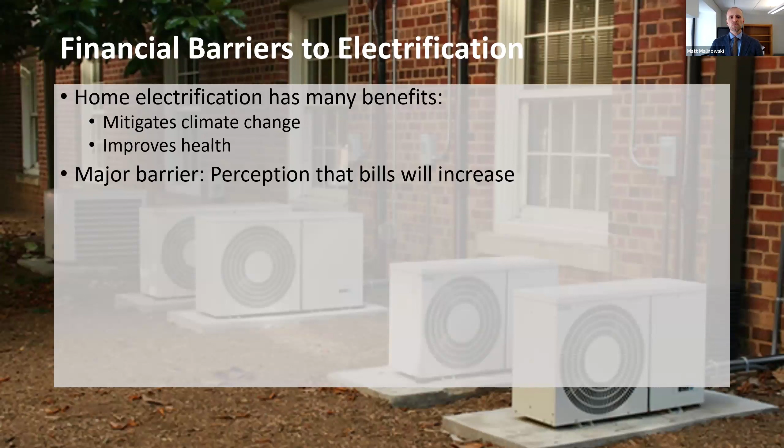Just a brief summary of our methodology: we simulated energy bills in 4 cold states - Maine, Minnesota, Colorado, and Connecticut - using ResStock modeling. These are hourly models of archetypal homes in each state that give you electric and gas loads, and also the results of upgrading those homes with heat pumps and energy efficiency. We took those model outputs and applied realistic rate structures based on those offered by the largest utilities in each state. That's the novelty of this approach - we didn't look at average rates or average heat pump efficiencies, but really looked at performance in each hour of the day and year and the corresponding utility rates to see what would really make a difference.

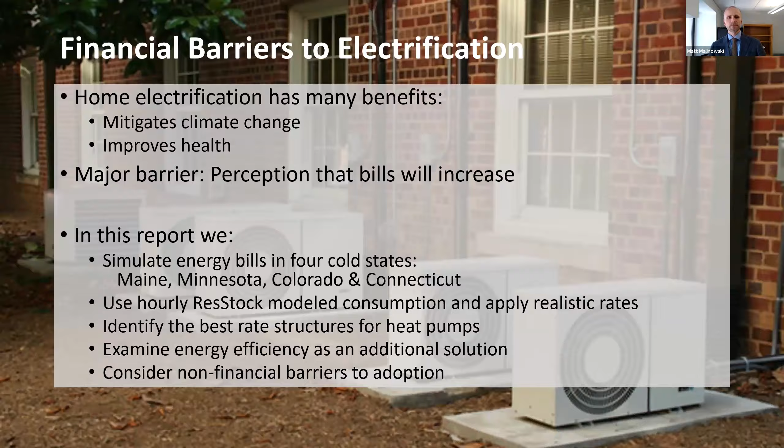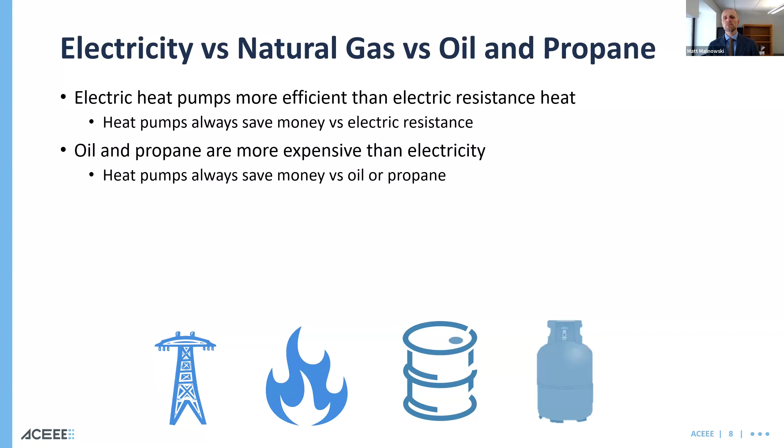Just a brief overview of what we can say with some confidence: heat pumps are more efficient than electric resistance heat. They are more efficient and more cost effective than oil and propane in terms of bills, and will reduce your bills. But the challenge is with natural gas, which is less expensive, much less expensive in some cases than electricity, and heat pumps sometimes can't make up that difference. They often save money versus natural gas, but not always, as we'll see in the subsequent slides.

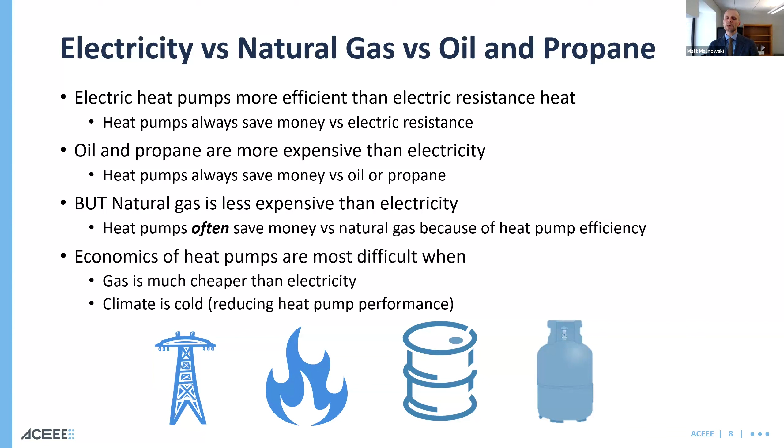This is exacerbated by the fact that in some states, gas is much cheaper than electricity, as well as the colder it gets, the bigger a hit the heat pump takes to performance. So again, it can't make up that cost difference in some cases.

But rates can go a long way to fixing this. If you imagine just a basic flat rate that doesn't change with time or season, the thing to understand is that the wholesale price of electricity to distribute and generate it changes throughout the day and throughout the season. So if you have a flat rate, customers using electricity during peak periods are underpaying for that electricity, while those using a lot of electricity during off-peak periods are overpaying, because the electricity should be cheaper then.

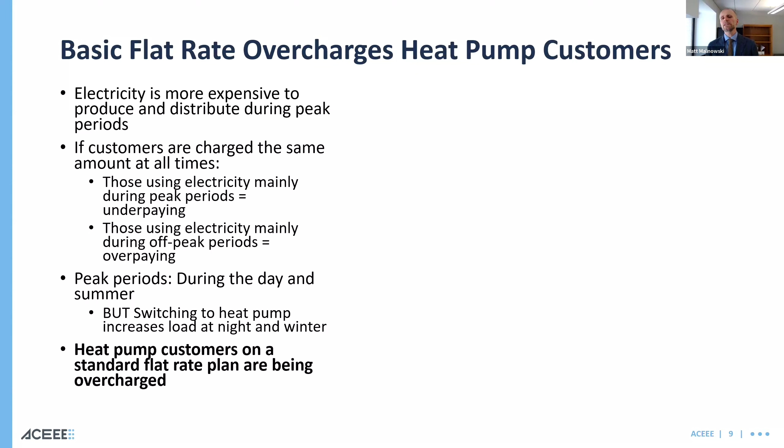And those peak periods in the northern states we're looking at typically occur during the day in the summer, when there's a lot of air conditioning but not a lot of electric heating. So as a result, summer electricity is the most expensive. But heat pumps increase the load at night and during the winter, and so currently, under these flat rates, those heat pump customers are being overcharged.

Here's an example of the electric load in the average Connecticut home in January, when it uses natural gas versus a heat pump. You can see a lot of that load is occurring at night, late at night.

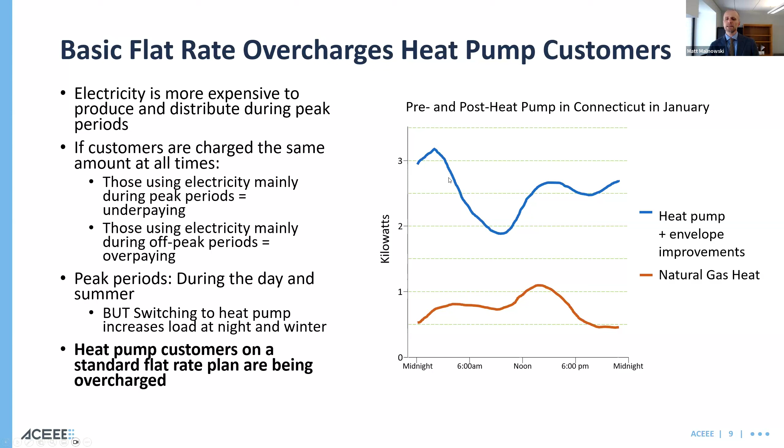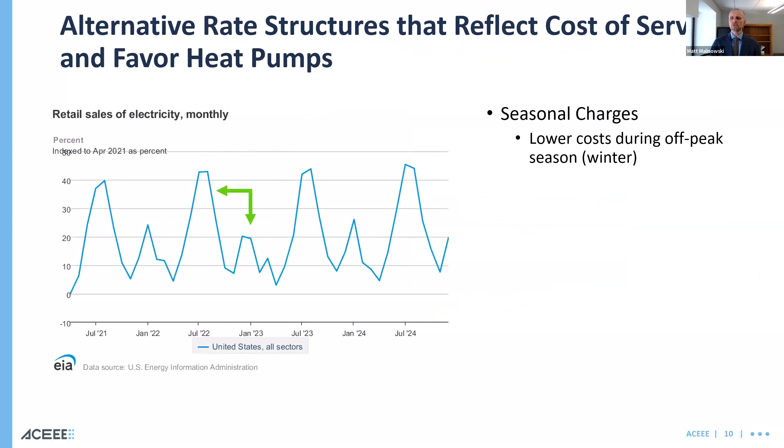So what kind of rate structures could reflect the cost of service and be better for heat pumps? Well, again, we're looking at the winter versus the summer peaks, so rates that take into account these seasonal changes and offer lower costs in the winter. Time of use rates, so maybe not during the afternoons.

Demand-based rates, that was an interesting wrinkle we came across while doing this research, as well as technology-specific discounts. All of these can help reduce the cost burden of heat pumps, make them, in some cases, lower the bills relative to gas, while also in many cases actually benefiting the grid.

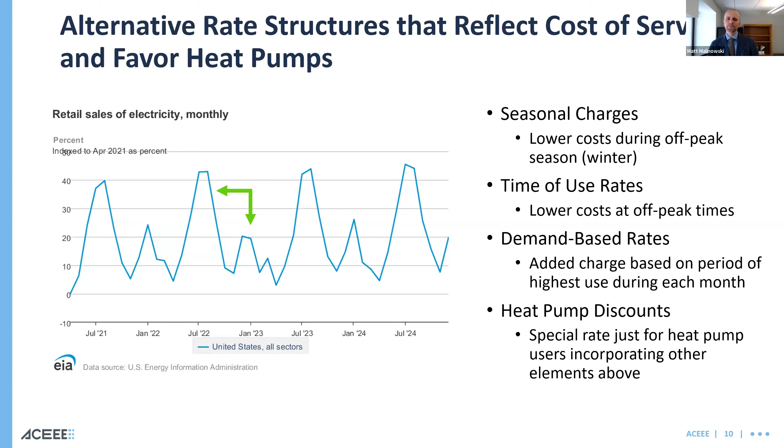Next, I'll get into the situations in each state that we analyzed. So we'll start with Maine. There, electricity is already priced pretty competitively with gas.

So here is the monthly average bill for the single family homes we analyzed in Maine with natural gas heating. And then where they just switch to a heat pump using that same flat rate, you see only a slight increase in costs.

However, there's also a special heat pump rate that provides a winter discount, but that's balanced by a higher cost in the summer. You can clearly see the summer bills go way up, but if you look at the average monthly cost, that actually ends up resulting in a decrease. So that to us is a good example of what's possible.

Customers pay more in the summer where electricity is more expensive to provide, but get a nice discount in the winter that makes the heat pump lower the bills relative to gas.

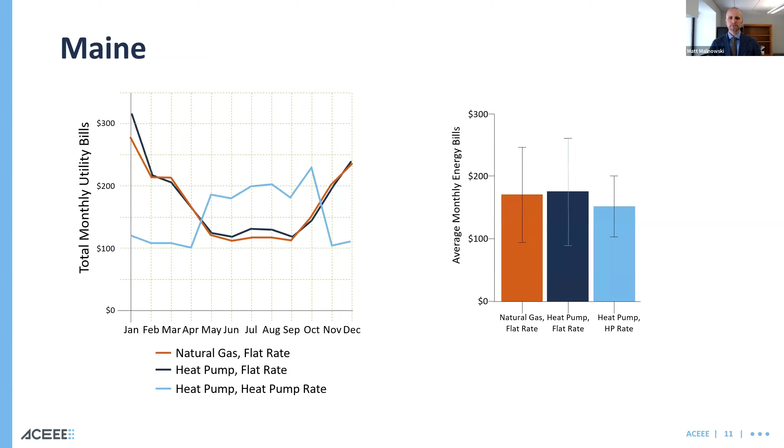Next, I'll go to Minnesota, where this kind of winter discount is available to all electrically heated homes. So again, starting with the total monthly bills of natural gas heated homes, and then what happens when there's also a time of use rate as well. Not much of a difference. And now we add the heat pump.

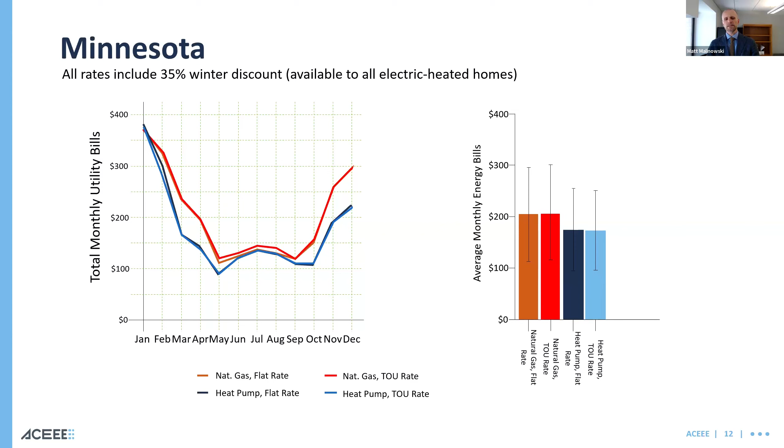So you can see, thanks to this winter discount, there's already a nice savings relative to gas. And here's the annual view, or the monthly average, and you can see that the time of use rates didn't make too much of a difference, but that winter discount, which is around 35%, makes a big difference and helps make heat pumps competitive.

Colorado also provides a winter discount, but that discount is less—around 10% or so. And so you can see that with that default 10% discount, even using the time-of-use rate, heat pump customers will see much higher bills in the winter.

We tried to apply that same discount from Minnesota, the 35%, and now you can see the impact. Once we do the annual averages, you'll see that makes the heat pumps break even with gas—I think they're slightly more expensive, but pretty consistent with gas. And just a note on the graphs, the whiskers are the standard deviations around the mean, so roughly two-thirds of customers would fall within those whiskers.

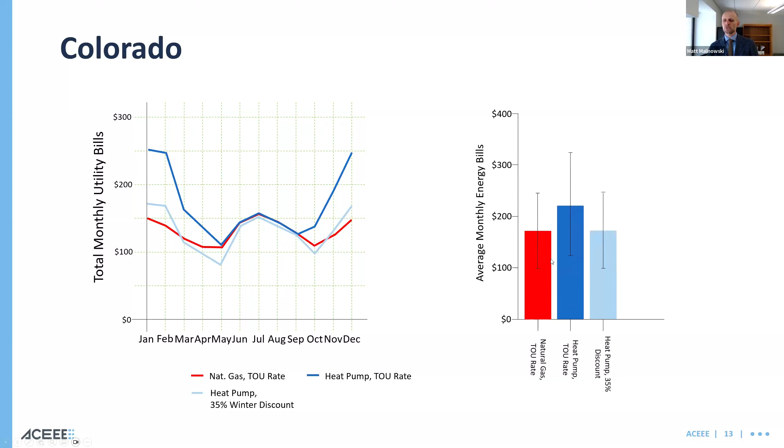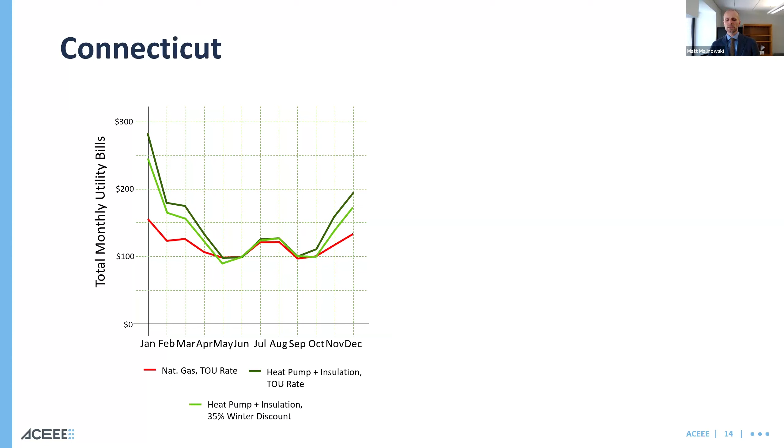The last state we analyzed was Connecticut, which has much more expensive electricity than gas. Even with insulation, even with time-of-use rates, the heat pump bills would go up for those natural gas households. So we looked to apply that 35% discount from Minnesota, but even that wouldn't bring the costs within reach. In Connecticut, we found that rates, or at least rates as they exist in the states we analyzed, are insufficient to bring the cost of heat pumps down to the same level as natural gas.

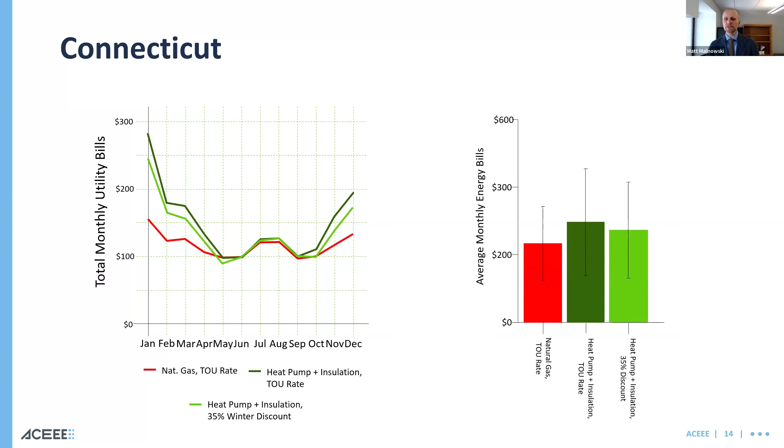But in the other states, we were able to bring them down. So some recommendations for utilities and state regulators: try not to overcharge heat pumps. They provide a service by using a lot of electricity in the winter during off-peak times, so heat pump specific rates might be beneficial both to the customers and to the grid.

For federal and state policymakers, the biggest challenge is just bringing down the cost of electricity. One suggestion was non-ratepayer based investments in distribution and transmission, or a price on carbon, or clean heat standards that will balance the landscape between gas and electricity.

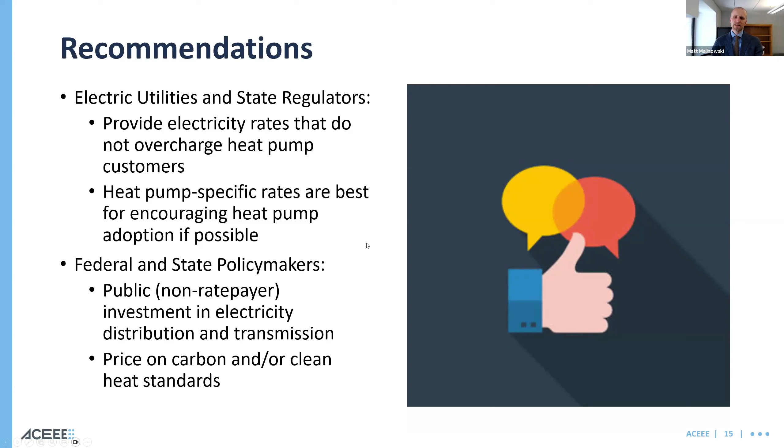So that's it for me. And back to you, Reuven.

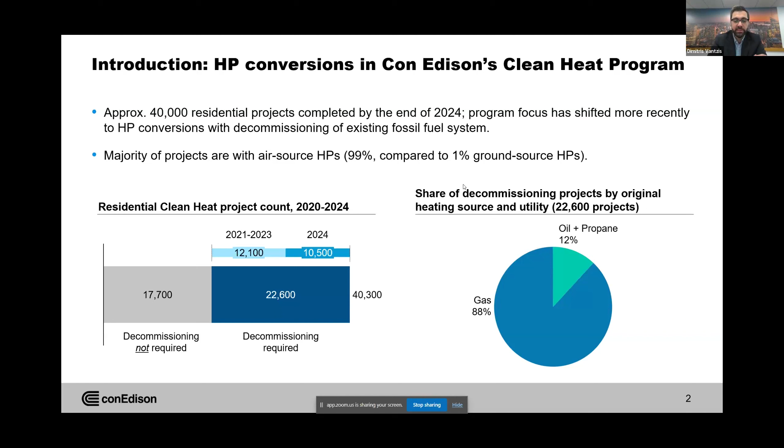In 2024, last year, we did an analysis of a small sample, about 80 customers of residential heat pump conversions. These are customers who converted from gas to heat pumps. We used AMI interval data on the electric and gas side to understand both the change in the energy profile of these customers pre and post conversion, and the change in their customer bills. These were all conversions that happened in the 2021 to 2022 period, so we're looking at a pre-install period around 2021 and a post-install period around 2022, 2023.

I'm not going to go into a lot of detail on this slide, but I included it because I thought it was very interesting. This slide is showing the average electric and gas energy use for the sample of customers in the year before and the year after the conversion.

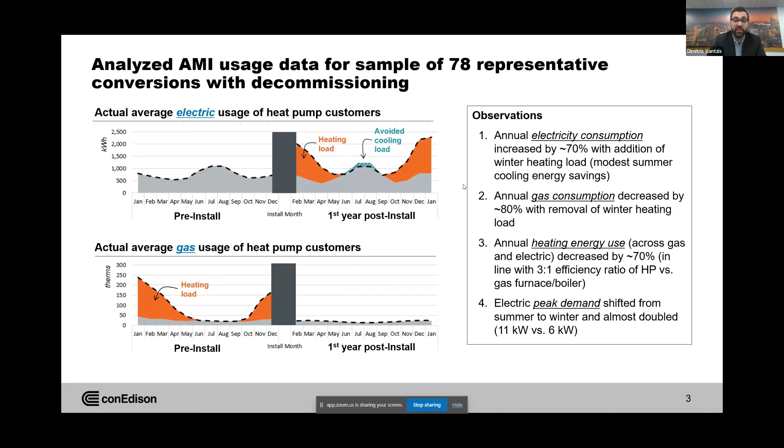Just looking at the energy use alone, you can observe that orange area in the charts, which represents the heating load for customers, that following the conversion, customers saw a decrease in their heating energy use of about 70%, which is really in line with what we expected, since we know that heat pumps are about 3 times more efficient than fossil fuel heating.

Now, moving on a little bit to discuss the story around energy bills.

This is similar to the analysis that Matt went through in the previous section. We compared the total energy bill across electric and gas for the customers in the sample for the period before the conversion, for 1 year before, and then 2 years after the conversion. The first bar is the bill the year before, the second and fourth bar is the bill the year after, and the third and fifth bar is an estimate of what the customer bill would have been had they stayed on gas for that second year on gas heating.

What you can observe here is that energy bills for customers heating their homes with heat pumps in that 2022, 2023 period were in fact in line with what they would have paid had they stayed on gas heating.

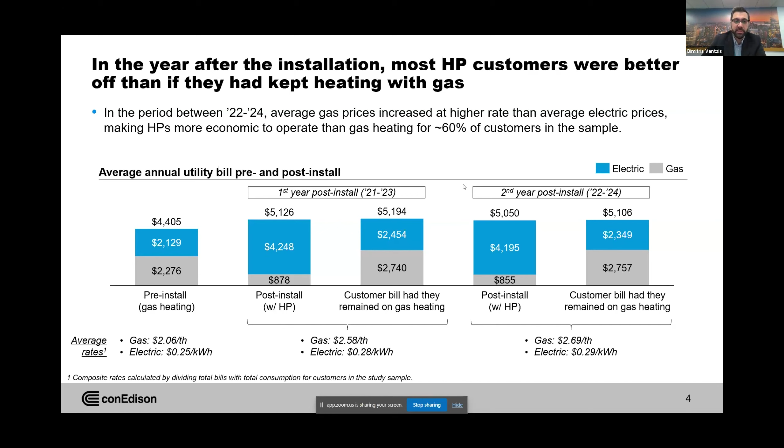In the same analysis, we've also run a sensitivity or scenario where we assume that customers using heat pumps for heating also enrolled in one of our voluntary electric rates, the select pricing plan. You can see the second and fourth bar on the chart, that their combined electric and gas bill for the first and second year after the conversion actually went down, and customers would have seen savings of about 15% compared to what they would have seen had they stayed on gas, and compared to if they were on the standard volumetric rate.

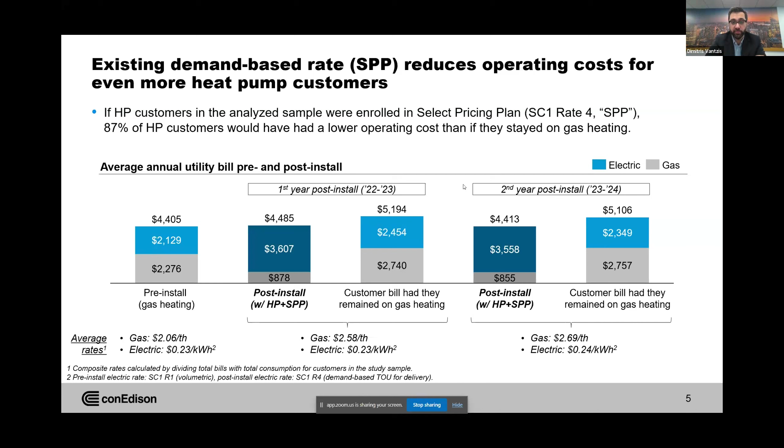A few words now about the select pricing plan. This is a voluntary rate open to all our residential customers. It's a demand-based rate, so essentially we're charging customers for the delivery part of the bill on a dollar per kW basis as opposed to a dollar per kWh. So it's not about energy consumption, it's about demand. There's a seasonal variation to the rate, cheaper in the winter compared to the summer, and there's also a time of use element, cheaper in off-peak hours, more expensive in on-peak hours.

Here at Con Ed, between 2023 and 2025, we offer a price guarantee for customers switching to this rate, meaning that if you're a heat pump customer, you enroll for the first 12 months of being on the rate, we compare your bill, and if your bill ends up being higher on the select pricing plan compared to what it would have been had you stayed on the standard volumetric rate, we pay you back the difference.

But what we've observed, having a couple hundred customers on the rate over the last couple of years, is that most of the time we don't end up paying anything back, because most customers, as you see here on the slide, about 84% of air source heat pump customers and about 90% of ground source heat pump customers end up saving money compared to the standard volumetric rate.

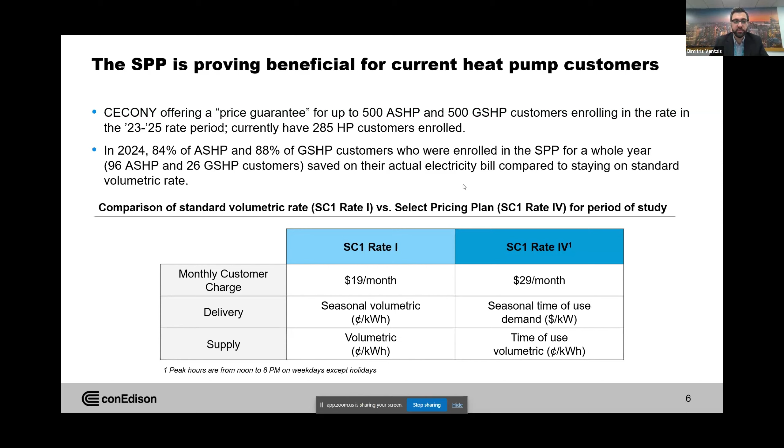A little bit about what we're doing to promote the rate to our customers. The analysis we've done, as well as the results we're seeing from customers enrolled in the rate, are very promising. We're excited about the potential for this rate to help heat pump customers reduce their energy bills. We've launched marketing campaigns to customers participating in the Clean Heat program, as well as contractors who install heat pumps through the program, to educate them on the rate and its benefits. We've taken steps to simplify enrollment, making it easier for customers to just click and enroll rather than having to call. We're also scoping the launch of a rate education tool on our website to make it a more interactive and simplified way of explaining what a demand-based rate is and the benefits for heat pump customers.

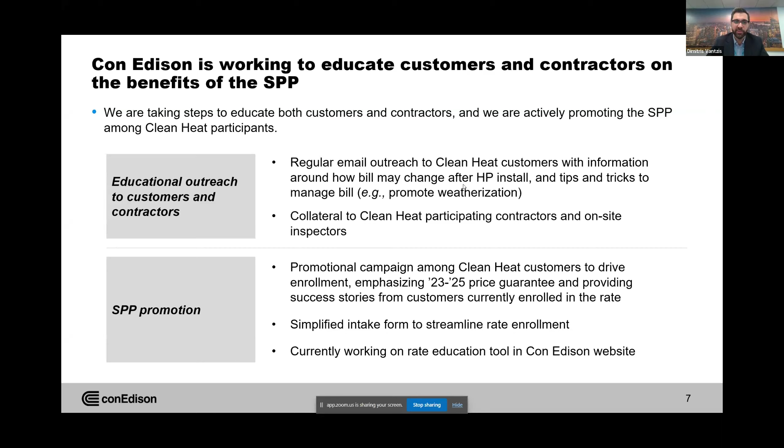Thank you for the attention. That's all I had prepared. I think it's back to Reuven now to talk a little bit more about behavioral strategies for promoting rates.

Thanks, Dimitris. I love that segue from Matt. What's great about what you just described is that I'm going to be touching on a lot of the same techniques you raised at the end there, and in the report we actually mention these in more depth. I just have a couple of slides here. My name's Reuven, I'm the next speaker. I only have a couple slides before I turn it over to Kara, who's really the feature attraction here in terms of behavioral barriers, specifically with regards to contractors.

So what are some of the relevant non-financial issues? Once the math works, it doesn't work everywhere, but once it is working, why do people still not upgrade to heat pumps for home heating? I'm going to use some social science lenses to look at this issue. There's three main buckets we've identified in the report. Number one, homeowners and contractors lack knowledge or awareness. There's a knowledge gap. Maybe they aren't familiar with heat pump technology, or maybe they aren't aware that energy bills won't go up.

There's ways to increase knowledge and awareness, and Kara is going to talk more about the contractor piece. Status quo bias is also important. Even if you're aware, you might be reluctant to switch rate plans, or reluctant to go with a new technology you're not familiar with. That's both on the homeowner side and the contractor side. I'll go into a little more detail on that in the next slide.

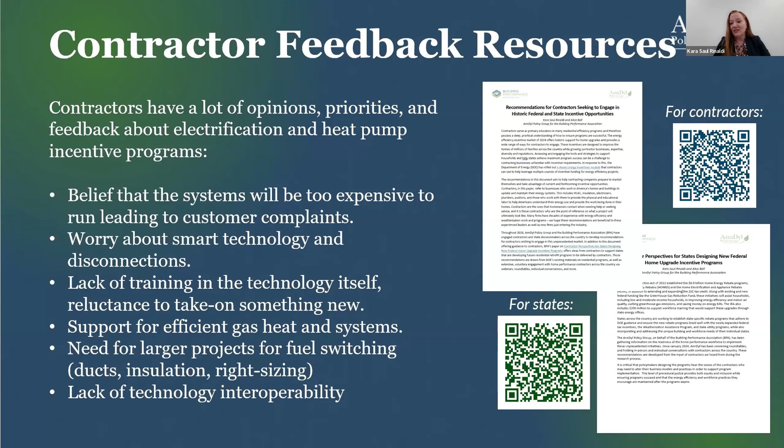But there are ways that, when talking with the contractor community, you'd see light bulbs go off. We have to remember contractors in the residential space are largely small businesses, entrepreneurs. If they have an opportunity to make money through a new business model, they're very open to it. So one thing is to connect contractors with training and certification.

Right now you might have heard of the silver tsunami, which is that a lot of contractors are retiring, which also leads to a lot of new training needed. Pretty much every contractor community is really looking for opportunities and access to training. If we want these new contractors to be part of a green revolution, or to have living wage jobs, they need education to really move these jobs forward.

So they need training, but not just on the technology, also on the incentives, on the rates, on how to market this, to help contractors really be able to be that bridge and educator to the homeowner. Because when somebody's heat pump or furnace breaks, they call a contractor. That's who they call, and that's the first person who's going to be educating them about all of these things.

We need to prepare for those barrier mitigations I mentioned, for the whole house view of what electrification really looks like. We're looking at electrification across the board, not just heat pumps, but also adding on solar panels, EVs, making sure that home can meet the needs of that homeowner as they're expanding and electrifying.

So what are the funding sources and strategies that can be stacked together, and how do they stack together? And being able to help contractors address those when they walk in, so that if they just keep seeing a brick wall every time they're trying to move through this installation, they're going to get discouraged.

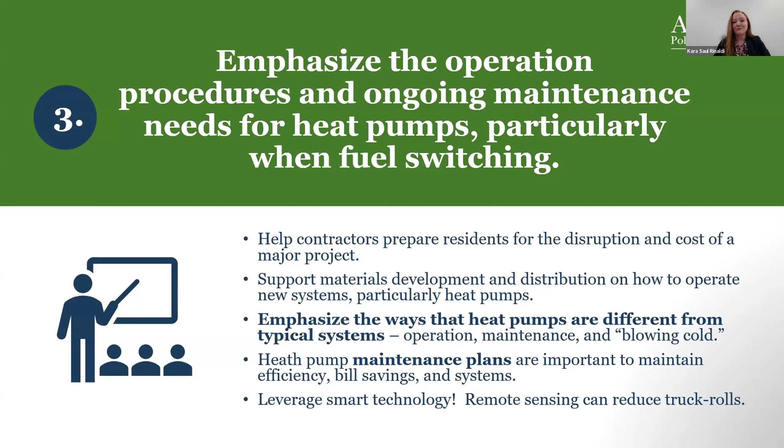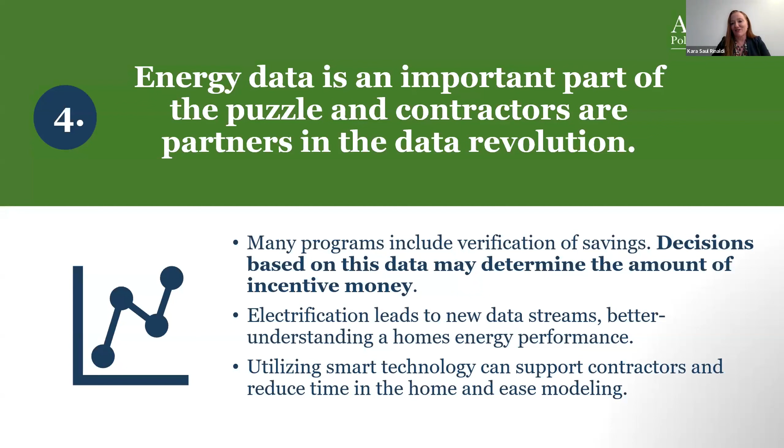Energy data is a big piece of this, and it's something I think folks aren't talking about as much. We saw some amazing data today from Dimitri and others, and all of this energy data is part of the puzzle. If contractors are part of that data gathering, it helps explain how energy efficiency is a resource, just like renewables, just like any other resource. Energy efficiency is a key resource for us, so contractors can be part of that data gathering and making sure we can get access to that data.

I'm sorry, I'm in a room that just shut off its lights. I'm at the California Energy Commission right now, and they're very energy efficient.

Encourage contractors to develop replicable project scopes, because if we can get a project scope from a contractor in a community, they can replicate it.

I had a Massachusetts contractor tell me a great story about how they did a big project at an HOA in a community of townhomes. All those townhomes were built at the same time, were the same square footage, and had the exact same issues. So he was able to replicate what he did for one homeowner for multiple homeowners, spoke at an HOA meeting, explained what he did and what incentives were available, and got a lot of customers as a result.

So sometimes being able to be creative that way, looking at ways to replicate the project, will reduce time and overhead for the contractor and really be both a moneymaker and a carbon saver. And that's it. Thank you very much for having me.